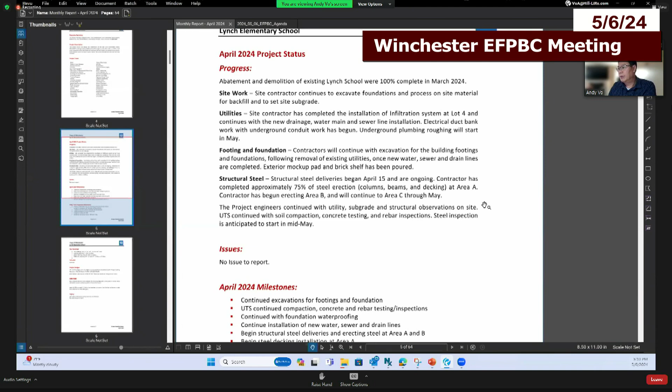Again, the water line, sewer, and drainage work are still ongoing. They finished the excavation part of that.

Structural steel, as I mentioned last month, the delivery date got pushed to April 15, and they were delivered on April 15. They finished about 75% of the steel erection. They still have work like detailing and the metal decking.

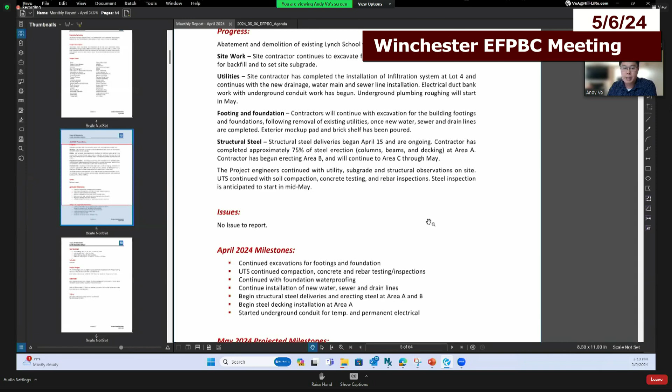We continue to have the engineer, Weston and Sampson, as well as UTS doing compaction and concrete testing on site. There's no major issue to report.

So a couple milestones were achieved in April: continued excavation, UTS continuing with testing, foundation waterproofing, and the utility work, which are ongoing.

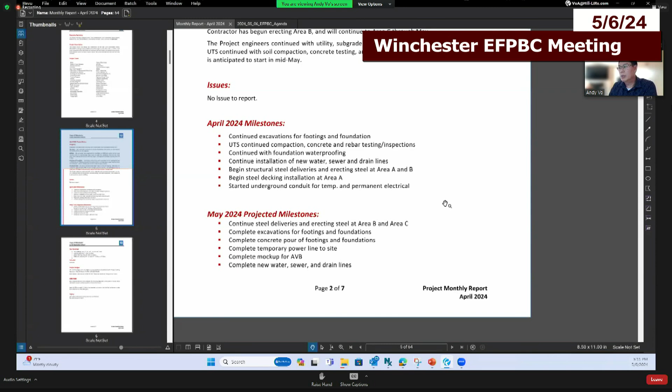Structural steel delivery and erection, we're starting to get into more of the B and C part of the building. Building A is about 90% complete. There's still some detailing they have to do.

They started the metal decking installation of building A, and they also started the conduit work for the temporary and permanent power.

Next month, in May, we're looking to continue with building B and building C for the steel, continue with steel delivery, erecting, and metal decking work. We'll continue with footing, foundation, concrete, and temporary power line work, do the mock-up for the air vapor barrier, and finish the water utility work, including the water line, sewer line, and drainage work.

Key meetings: we have our regular owner, architect, and contractor meeting every Thursday. So May 2nd, 9th, 16th, 23rd, and 30th are our regular meetings.

The next LEED meeting is tomorrow, I believe around 12:30. Tonight's meeting is EFPBC at 5, and the next MSBA visit will be the 30th and July 25th. Also, another milestone coming up is the topping off ceremony.

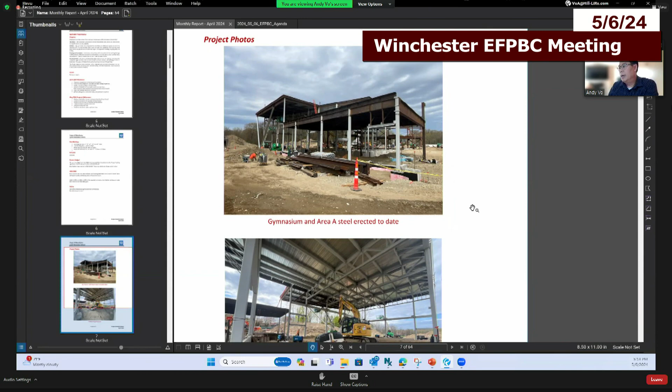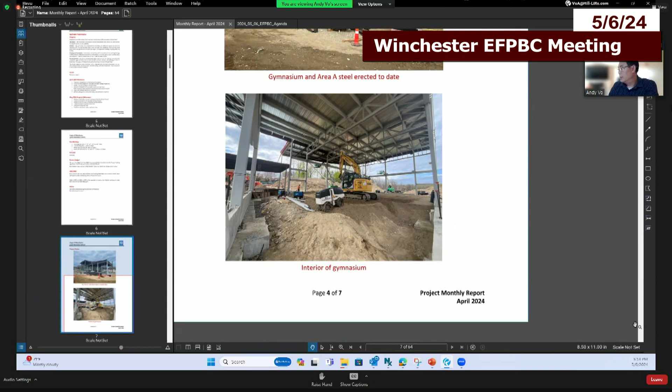So progress photos, you're going to see some here and on my presentation. This is steel erection at the gym area in Area A today. As of last week, this is where we were. And this is inside the gym, where the metal decking I mentioned is installed at Area A.

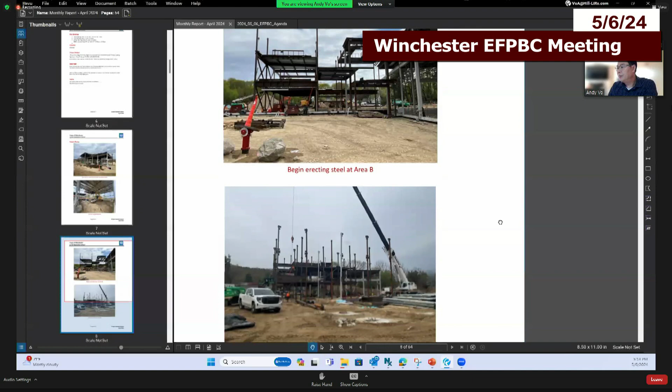This is another area, looking at Area B starting to erect. In May, you'll see more progress into the C area. Here's another view of steel erection at Area B, they're going to start doing the metal decking soon there.

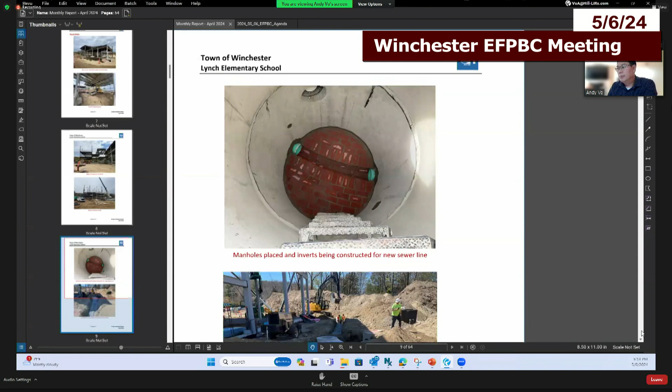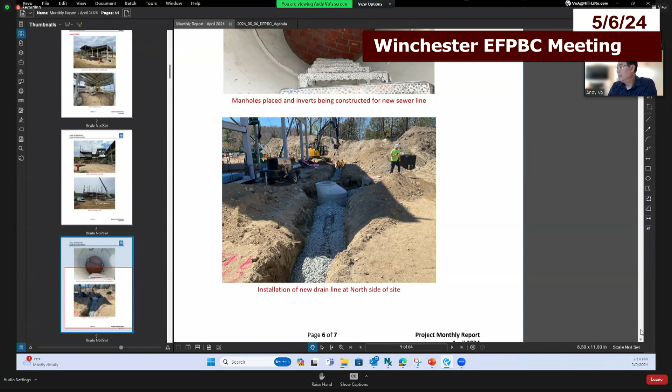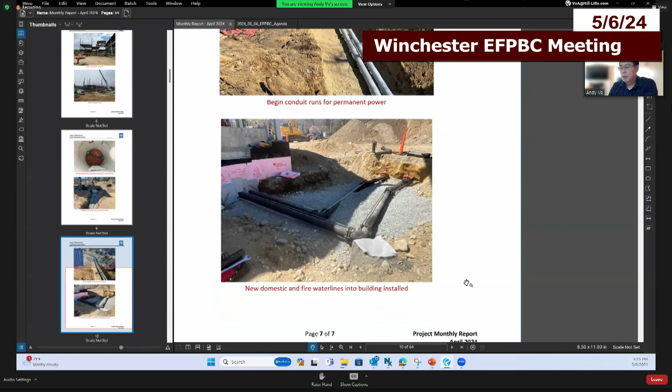Financially, we're right on budget, nothing major to report. Cash flow wise, the contractor is starting to catch up because initially they said they'd deliver the steel at the end of March, but that got pushed about two weeks. The end date will be the same, no change to that, but they're going to catch up on cash flow.

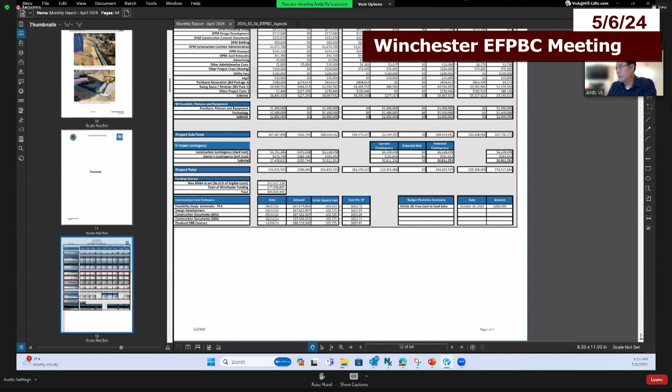Schedule wise, right now we're on schedule. We have the full schedule here if you guys want to take a look at the detail. There's no change to the schedule.

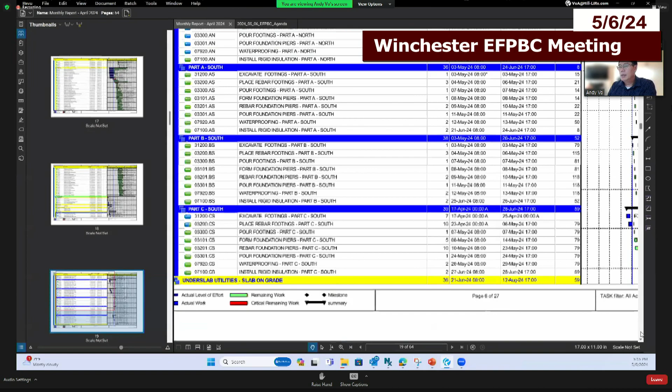We also attach our weekly reports with the manpower. I'll just jump right to that. On our weekly reports we have more pictures if you're interested in seeing what's going on each week. I'm not going to go into detail, but I want to share the manpower numbers.

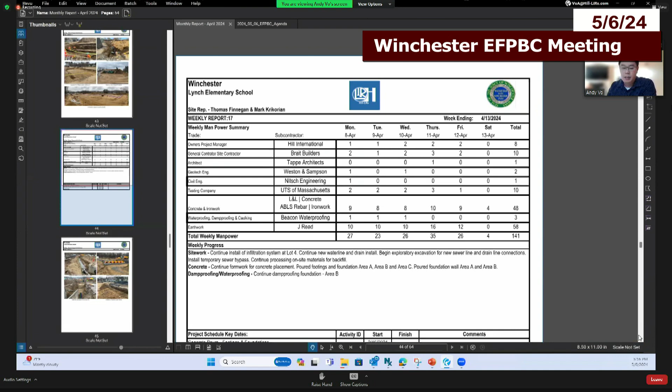So we have about 141 manpower on site. However, of that, there's about 18, say 8 for Hill and Brait Builders. So take that 18 out, we still have about 130 there—no, not 130, 120 to 130 manpower wise.

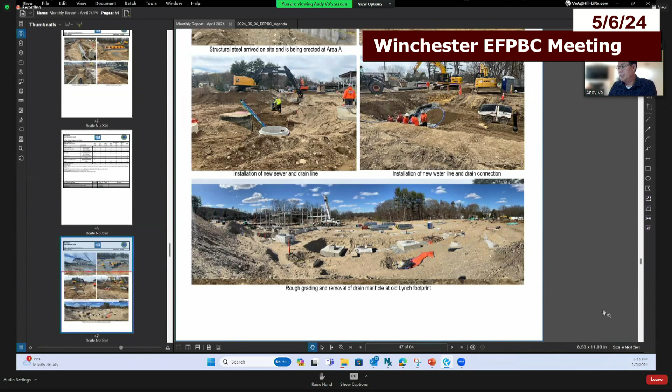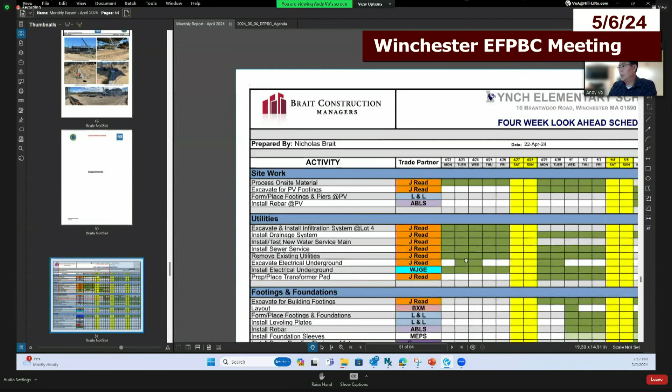Again, there are more pictures in there if you guys need to review it in more detail. We do have them in the reports. And then also we put our regular 4-week look ahead from Brait Builders on there with the other activity going on in the month of April.

And again, we have the submittal log. Anything hot, we concentrate on the hot items. The design team has been doing a great job concentrating on all the hot items. Every subcontractor will be sending in, like they already started sending in the paint and color and stuff like that, so those will be reviewed at a later time. But right now we concentrate on concrete, steel, windows, any long lead item. We want to concentrate on those, and we review this with the design team and the owner at every OAC meeting.

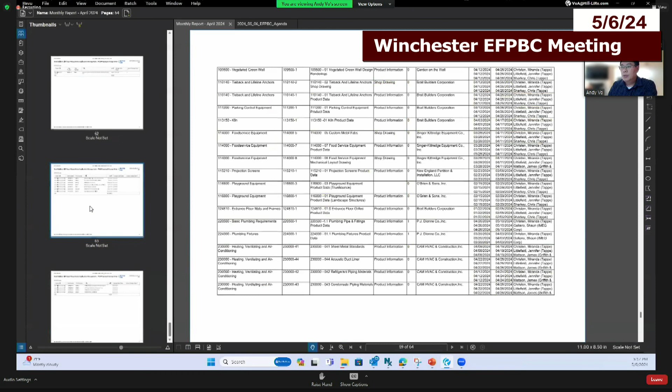As I mentioned, there are a few PCOs out there. Our team is reviewing them, and we're going to review them with this committee at the next EFPBC meeting. We're going to combine them into one change order, and when I say review them, we look at the rate, we look at every single detail to make sure that they're reasonable. Sometimes we negotiate them down, and we check the contract to see if we own it before we make the recommendation to the owner.

There are a few pending PCOs out there. I'm still waiting for the contractor to submit. These are the 4 out there right now.

Any questions on the report before I jump onto our regular presentation?

No, I only have one question, and I ask if you could get a good picture someday of the canopy foundations, whenever you get to those, for the solar. Okay, so send it to you, Jay? Oh yeah, just include it in your report. I think it's interesting for everyone to see what goes into that. We're sure to have it. Yeah, Mark is very detailed. Mark Krikorian from us, we'll make sure we have it.

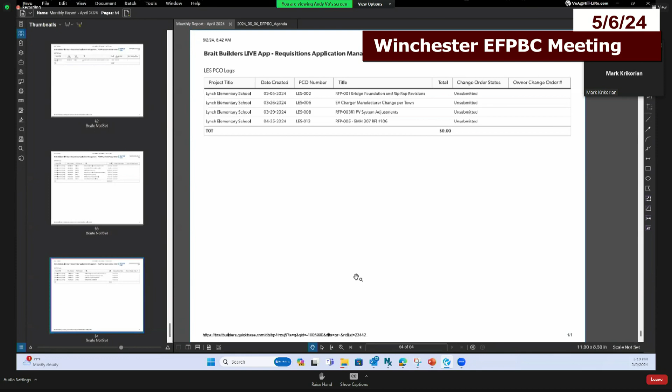Okay, so this is our regular presentation. I do have some more pictures that I want to share, and then I do have a time lapse similar to last month, but this is for the month of April. As I mentioned, the construction that was going on is the existing water line, the sewer line, and drainage.

Those are the ones we want to finish and get out of the way and backfill, and then we can concentrate on the steel and the exterior work. Footing and foundation wall, those are ongoing. As I mentioned, we got the delivery of the steel and metal decking.

Underground electrical, I showed a picture of that earlier. They started that work in April. And then, as I mentioned, we completed the infiltration work at Lot 4. Last week I reached out to the MSBA about the PFA bid amendment, and also again today, no update yet.

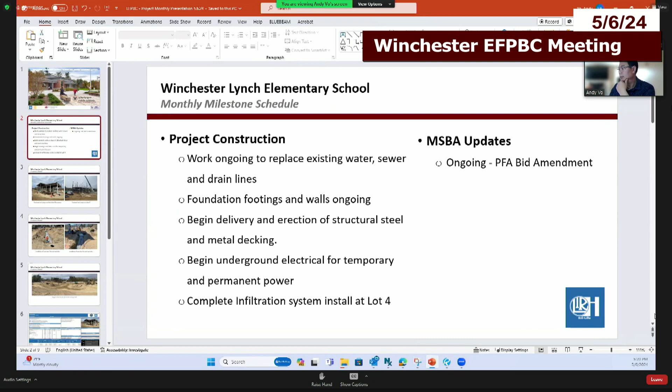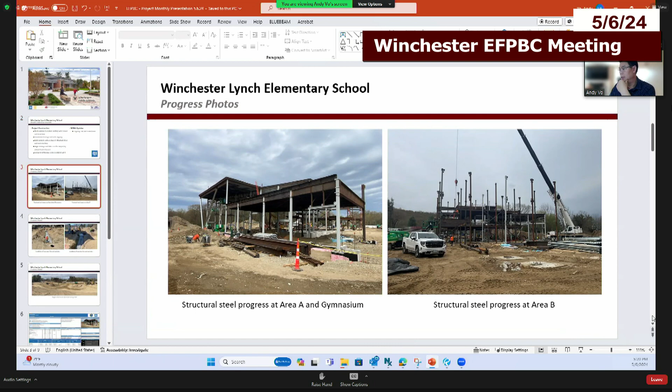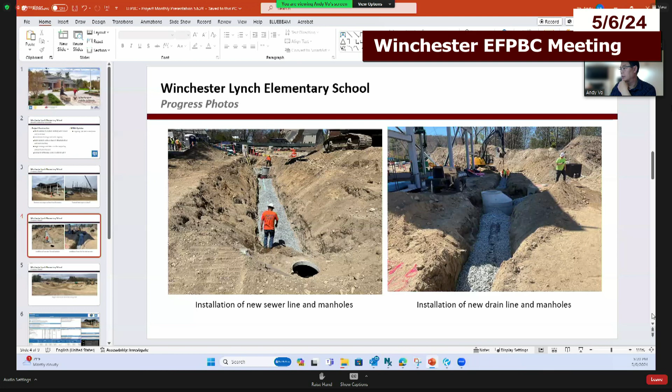So a couple more pictures here. Steel erection at A, I think this picture was again a duplicate from the monthly report. Another picture for the new sewer line manhole. This is the drainage line in the manhole that was there. Here's another overview from the camera, seeing the entire site here.

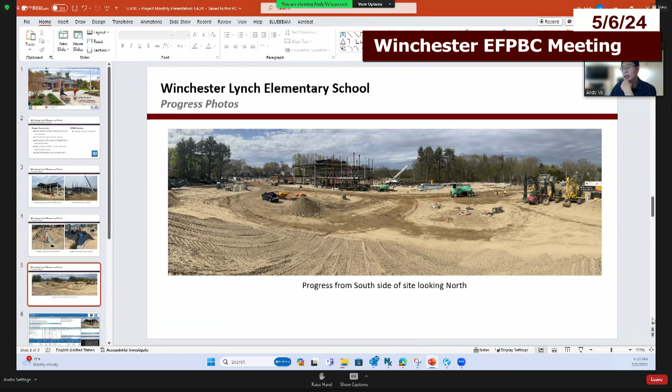Financially, we're right on track, a little bit under on the cash flow, but they should be catching up very soon here. So the next major milestone will be starting the roofing in May, so they will be starting that very soon. Slab on deck and slab on grade, that will also be starting very soon in May.

So I have substantial completion, not completion, of the roof and the metal decking. Those are targeting for September, and also at the same time, following that exterior, the sheeting, the framing will follow. So again, cash flow wise, we're right on track.

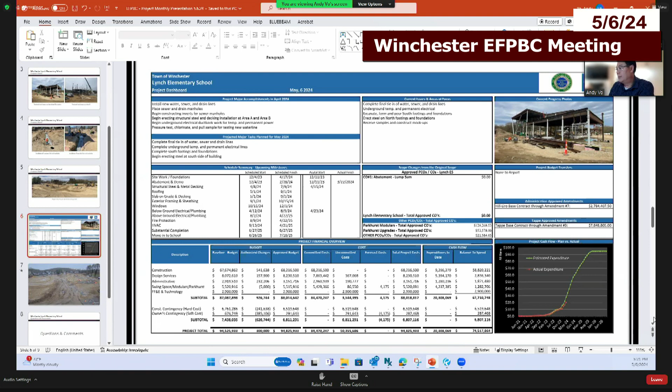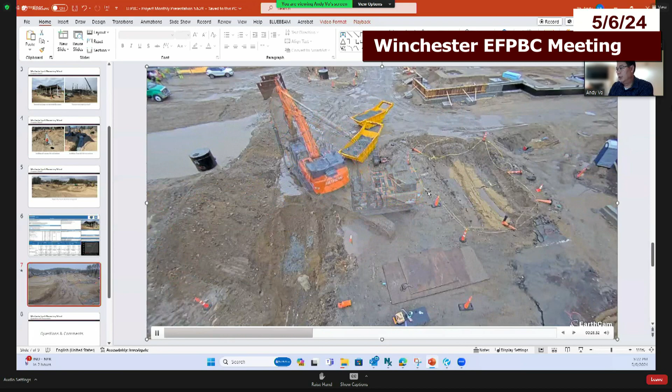So here's a time lapse that I want to share. These are the activities that happened in April. This is where we have the water line area down here. Also the manhole, they're doing the manhole work here. Steel erection.

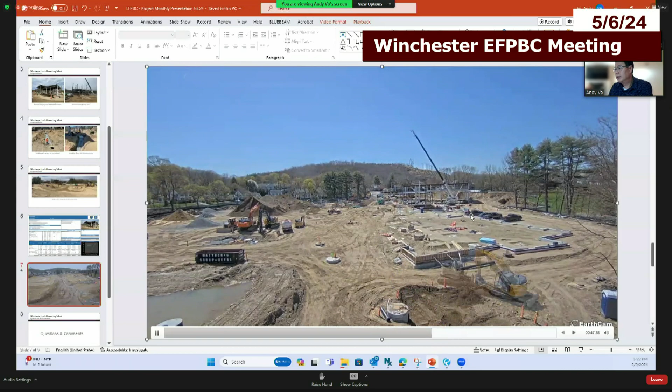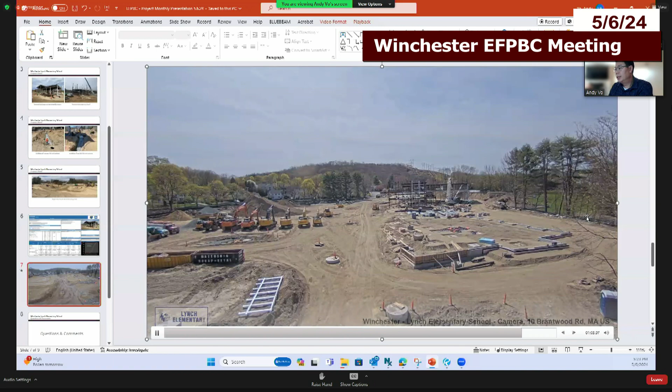That's it. I'm going to put this presentation onto the Google Drive as well, so you can see the time lapse there. That's it for our presentation. There's a lot going on at the site.

I think once you're there for the topping off at the end of the month, it will be pretty exciting. I know Mark is out there every day and sees all the great stuff. So anything I missed, Mark, that you want to add? Mark O'Corian: You seem to have covered everything, Andy. As he mentioned, there's quite a lot going on. Every day you're seeing major changes on site, and it's coming along well.

Does anyone have any questions for the Hill team?

I wanted to say I bumped into the gentleman who was concerned about the truck traffic and how fast they were driving. He said that right after I reported it, things changed, and he's very happy with how everything's been progressing with traffic in and around the local residences near the school. That's very good to hear. Thank you, Don. That is on our agenda every Thursday. We talk about safety and traffic, and we want to make sure we address those. Thank you, Don, welcome.

Anyone else before we move on? Okay, seeing none.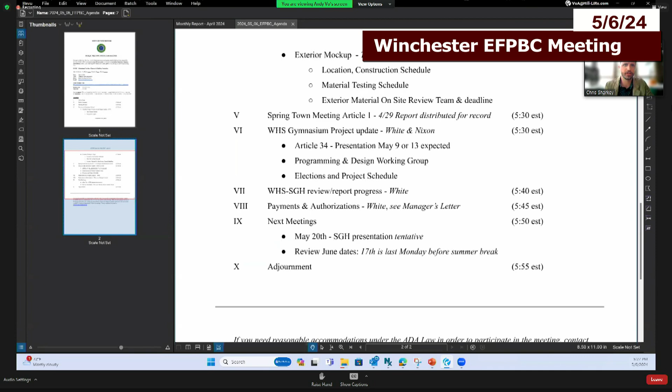Yeah, Chris, I have a couple slides if you want to go through that. But I do think the big thing is getting final say on the window finish. I can share what I have on the mock-up. Andy, do you mind unsharing? Thank you.

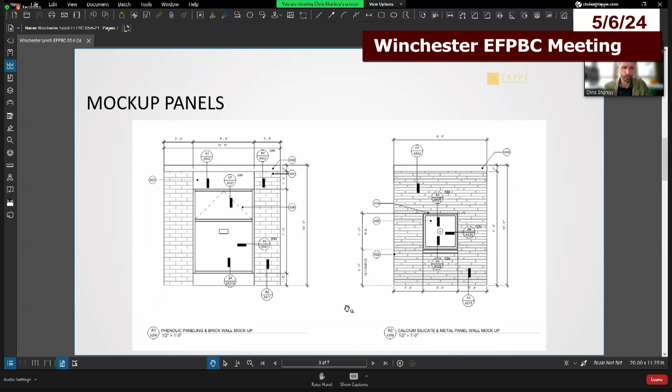So we're just talking about the mock-up location and some of the testing and things like that. This is an image of the two mock-up panels in our set, showing windows and a curtain wall within a couple of masonry types, the brick and then the Ariscraft or calcium silicate, and some phenolic panel on the left one. That's what will be built up for the mock-up. The footings for those two panels are out on site, and we're just waiting for those to be fully built out.

This is a site plan, the new existing layout. This is Hill's trailer, with Brait above it, and you can see the Horn Pond Brook bridge. The mock-up is just to the north of that - that's where the two panels will be. But currently all of the samples we're talking about - brick, calcium silicate, phenolic panel - they all live in the Hill trailer. I got a picture today from Brait that shows them all laid out nicely.

Mark, you want to jump in? Two questions. One is, those samples, are they for the mock-up panels, or are they for the building? Or have they been submitted for approval?

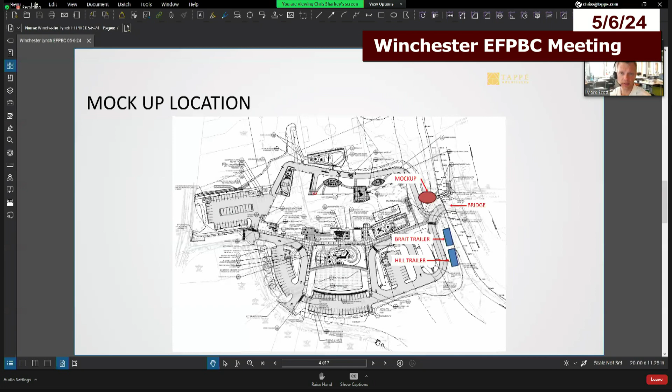When will the mock-up panels actually be complete? I'm hearing that you need to approve a color for the windows, but we don't have a mock-up panel with all the materials on it. So we're not going to get the fully built out mock-up panel with all the brick or calcium silicate on there before we need the windows approved, right?

So we have smaller sample boards of the calcium silicate and the brick. We have smaller pieces for the phenolic and the metal panel that are in the trailer. So we're hoping that from those samples we can make a determination on the final window finish color, and that would be what we're shooting for.

The larger mock-ups for us are about performance before aesthetics, so we need to make sure they're tested. A lot of times we won't test any of them with the masonry on there, to make sure there's no leaks in the AVB. That pushes things down the road a little bit, and that's why we're trying to gather some of these smaller sample boards to make these decisions for the windows as best we can.

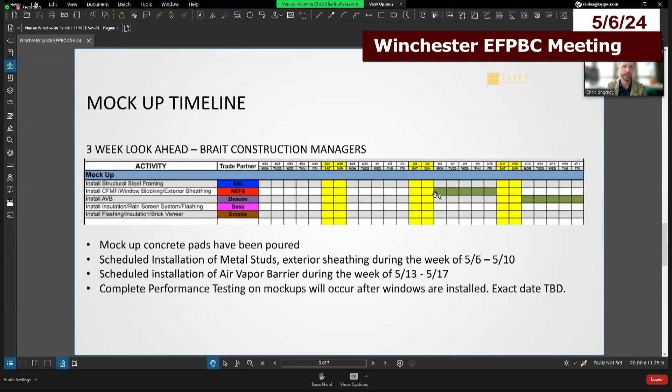What are the rules for entering the site? Park out in the street, I assume, and walk. Yes - will they check in at Hill's trailer, or do they have to check in at Brait first, or can we check in at Hill? We're asking that everyone check in at the farthest trailer, the second trailer. And I would park on Brantwood. Yep.

You probably could get on site, but I wouldn't do it. No, I wouldn't do it.

So that's all kind of leading to this, right? As we've talked about, the windows, curtain wall, storefront - those are all the longer lead time items. So we're trying to get all of this done by the end of the week so that we can release the windows. And that's all I have.

Okay. Any additional questions for Chris? So do we have people interested in making the site visit to do this? Do we have any volunteers?

When's the site open, on Thursday? Mark, what time do you get on site - you or Tom? The site is open at 7 a.m. I know that's a little early for some people, but anytime between 7 and 3:30 or 4 p.m. should be fine. We can always arrange to be there and have someone there.

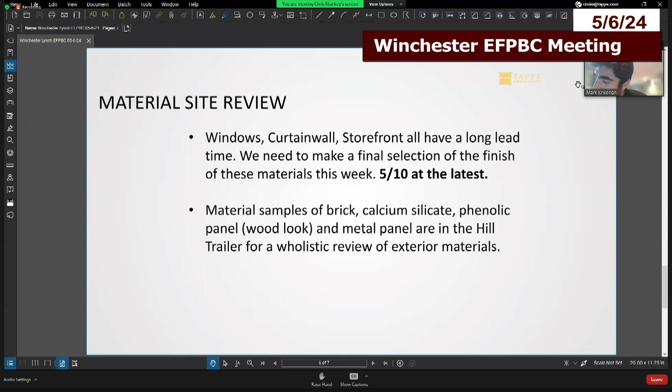Okay, excellent, thank you guys. I'll definitely drop by, but it's not my expertise anyways. All right, we'll move on, awesome, to try to catch up.

Spring Town Meeting - Chris has done a lot of work on this and presentations, if you've caught it all. We shared a couple of the presentations over the weekend. We did not - Article 19 is coming up Thursday, Chris, is that confirmed now?

The finance committee voted unanimously to recommend favorable action on the update to the master plan. The school committee voted unanimously to support it. And the vote went down 130 in favor, 20 against - so very strong support. So the master plan is funded.

And town meeting opens in 53 minutes from now. We are not expected to pick up Article 34 until Thursday - that's the high school gym project that Mr. Fallon and I will be presenting.

Okay, any questions for Chris on that? I happened to watch it on TV - Chris, you nailed it. So anyway, I meant to send you a text, but I thought maybe I'll do it this morning. I got busy, but anyway, thank you, great job.